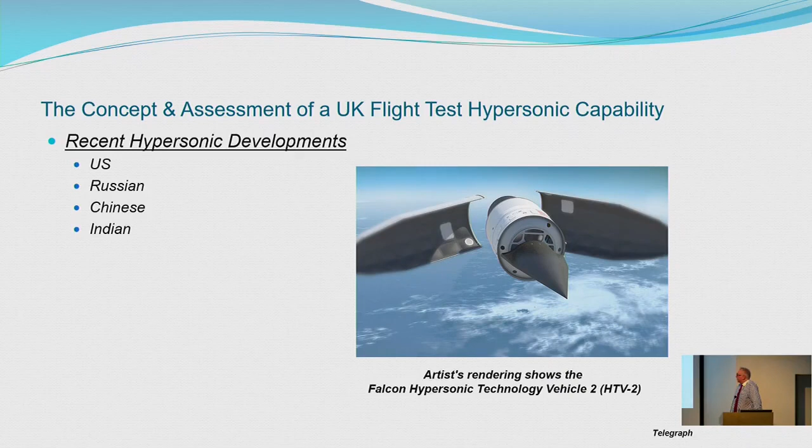From the US, we're now looking at some glide vehicles. The US does have some experience, quite a lot of experience within hypersonics. Their latest vehicles are things like the AHW and a previous glide vehicle that they tested, which unfortunately failed due to some issues we'll have a look at later. But that goes to show just how difficult it is to do these sorts of programs. Remember, when we talk about hypersonic capability, we're not just talking about CFD and wind tunnels.

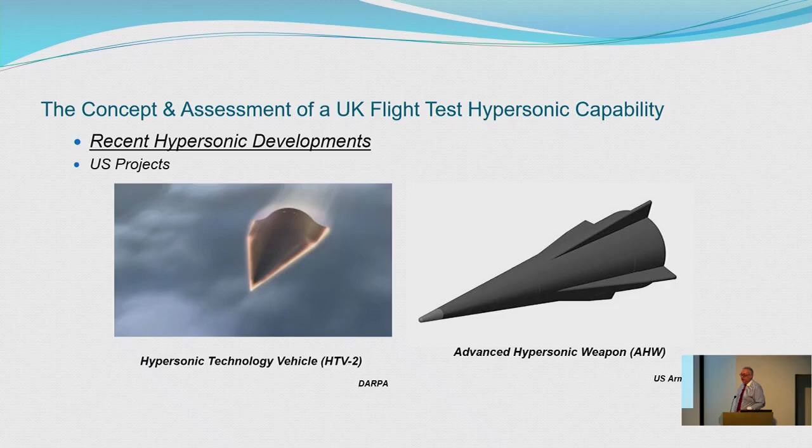The whole of this system, all of these elements need to work together as one. It's a lot of systems engineering that needs to go into these programs. Even more so if you decide to put some form of propulsion system on your vehicle, because then you've got to worry about propulsion integration and things like air intakes, etc. So a lot of studies would need to be done. And the only way that we currently have to try and see how all of these can work together is by doing some form of real-life flight test.

So HTV, primary effort for the US between 2003 and 2011, designed to glide at a very high Mach number, Mach 20. Two test flights were done back in 2010 and 2011. Unfortunately, the test flights were not a resounding success, mainly due to some control issues that then led to the aerostructure breaking up. So again, another important element for these types of vehicles, and comes back to capability, is how good are your materials, how good are your manufacturing processes to build these types of vehicles.

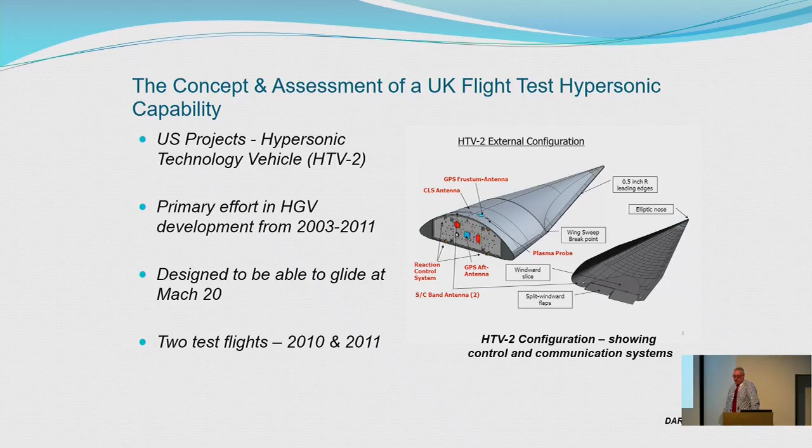So this, in a way, was a bit of the wake-up call that the West received with regards to glide vehicles and hypersonics, and especially the progress that the Russians have made.

So the Russians have also been looking at scramjets and hypersonic work for quite a while, but this was the first program that they made public in the best way that they can. It was revealed by President Putin in one of his State of the Union addresses or Federal Assembly address in 2018. The main reason that they give is to avoid any US anti-ballistic missile systems.

A number of test launches have been conducted. The last one was in December 2018, and I believe now this system, if you go by official releases from Russia, is now operational. It's launched from one of their larger ballistic missiles, an SS-19, which is also being replaced by their new next generation long-range ICBM, which they call SARMAT. Similar to the HTV, this was going to be able to glide about Mach 20.

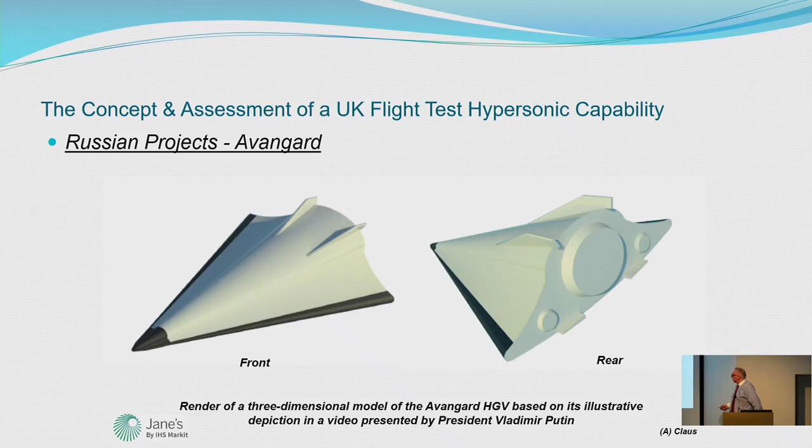Again, if we think about how someone would use these, the best way to get the biggest bang for your buck would be for your launch vehicle to carry as many of these as possible. So this is just an artist's illustration of how these glide vehicles could actually be used. What we're seeing here is the original test vehicle, and this is possibly what could be done for SARMAT, their latest system. Now, whether or not they would plan to use these vehicles as a like-for-like replacement for conventional RVs is still up for question. However, they've come quite a long way in a relatively short time.

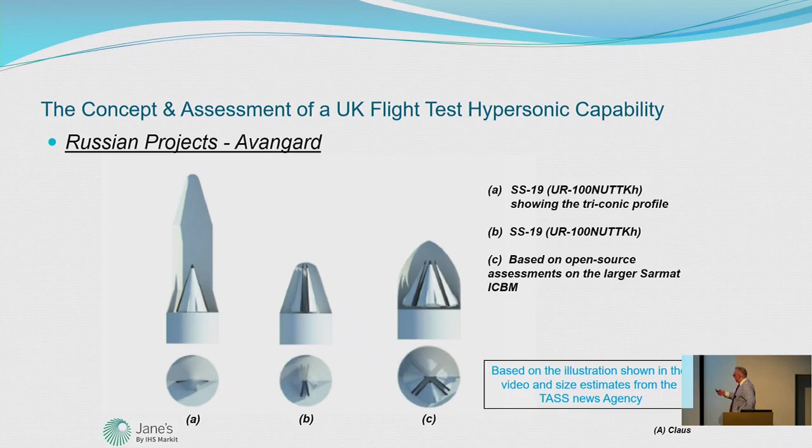The other area that was a bit of a shock to the West was what's been going on with China. China has been following quite an ambitious program in hypersonics, which has resulted in this DF-ZF, the glider part of their missile, their booster system, called the DF-17.

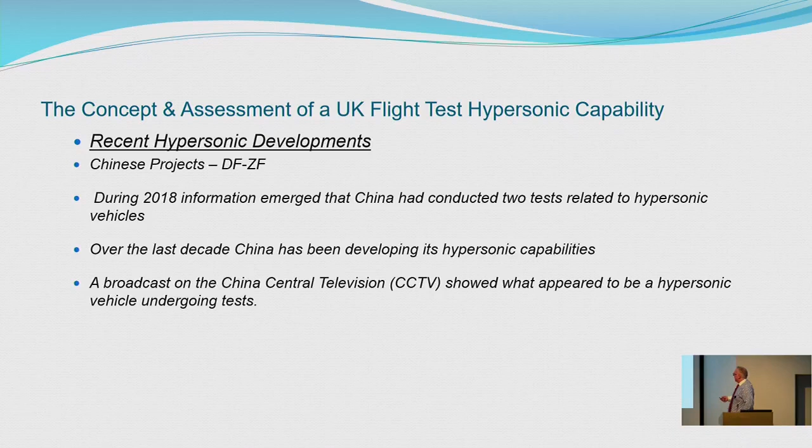Little bits were drip fed to the media about the work they were doing. Again, very interested in glide vehicles, with some pictures showing tests in a wind tunnel. This is an actual report taken from a news broadcast, showing a blue recreation of the vehicle, a lifting body configuration. At this time they were very highly focused on looking at glide vehicles.

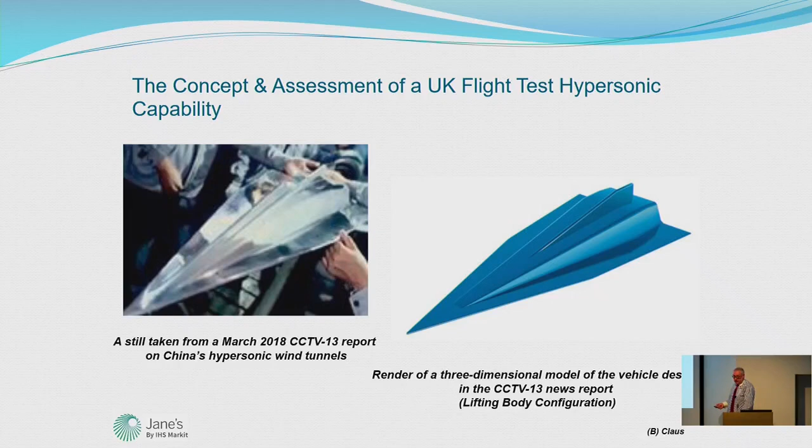To support their development capability, they've used balloon drop tests. Around the same time, some images appeared showing balloon tests. You might think, why would we want to do balloon tests with regards to hypersonic work?

Well, if we've got one of our models with a small rocket motor on the back, we could take our balloon launch system up to a given altitude, drop it, kick in our motor, and achieve some level of Mach number that we want. If the vehicle is instrumented, we can report back things like forces, temperatures, etc., which would feed into your overall development program.

It's quite a useful way to gain information at a relatively low cost. We don't have to worry about large-scale boosters, we're only really concerned with the manufacture of these drop test models. There were 3 different types that they were looking at.

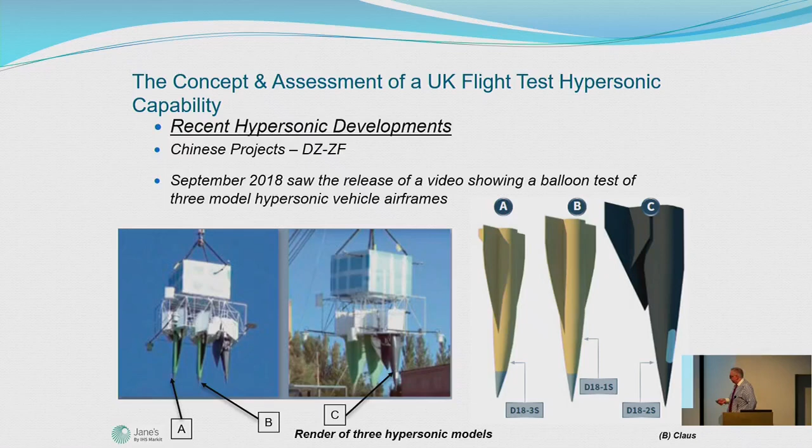All of this work fed into the DF-17, which was shown back in October 2019 as a new potential glide vehicle. Now, unlike the Russian system and the US system, this is a much slower vehicle, only going to about Mach 10.

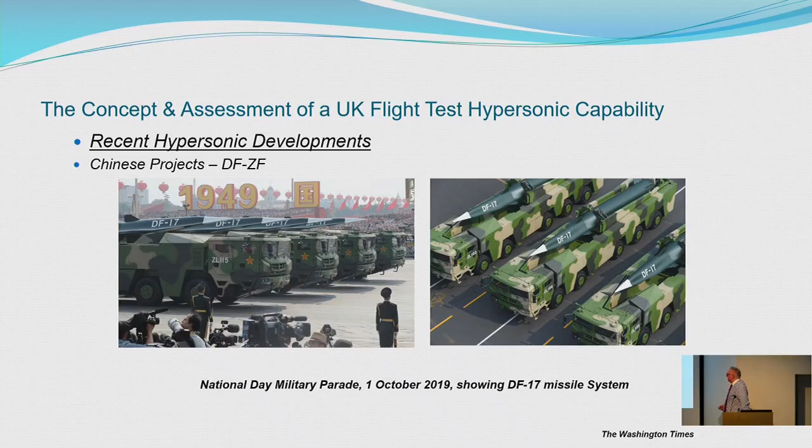But development of these sorts of systems has now caused a knock-on effect. It's not only the US, the West, that's concerned about hypersonic capabilities, it's also regional powers. One of those regional powers very interested in what the Chinese are doing is India, and we'll get onto them in a moment - I'm jumping the gun slightly. Essentially, China wants to try and match, and if possible surpass, US capabilities in hypersonics, not just hypersonics but also things like access to space.

They've actually done some further demonstration of that work on their capabilities. Many of you may be aware of seeing in the press that there was a lot of fuss kicked up in October of last year about the testing of a fractional orbital bombardment system - basically having a vehicle that would be in space and could then just drop warheads on you whenever it liked. There was quite a lot of discussion in open sources about that.

A number of sources picked up that this was another test of an HGV, but what was different to the previous test was the ejection of a secondary object or secondary payload. It's not clear what that payload was or what it could mean, however there are various ideas of what it could be, ranging from a submunition to an air-to-air defence missile - a missile to defend it against your incoming interceptor - or simple countermeasures.

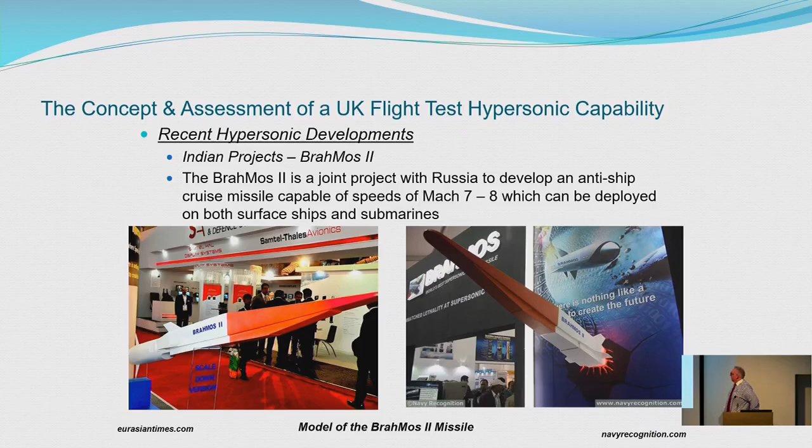Another little project they've done, and again feeds quite well into our discussion about test capabilities or flight test capabilities, is this one: their HSTDV, their Hypersonic Technology Demonstrator Vehicle. For this particular case, it's a scramjet-powered vehicle. It was launched by an Agni-1 ballistic missile and tested. The first test was not successful. A later test was.

The interesting thing about this is comments have been discussed about future development for this system and how this could actually be used as a carrier vehicle to carry either other ordnance and things like that. What's interesting from a technology development point of view is a lot of this is homegrown. There is some Russian input, and input from other countries as well, but a lot of the work has been done by India.

India has been developing a lot of their hypersonic capabilities, not just test but ground-based as well. Lots of new wind tunnels, new projects, mainly through fear of what China has or has not got. They're trying to catch up. So even though this only flew powered for, I think, 6 seconds, it's their first scramjet test of their own engine. And as we said earlier on, those 6 seconds of actual flight test data usability is actually worth its weight in gold.

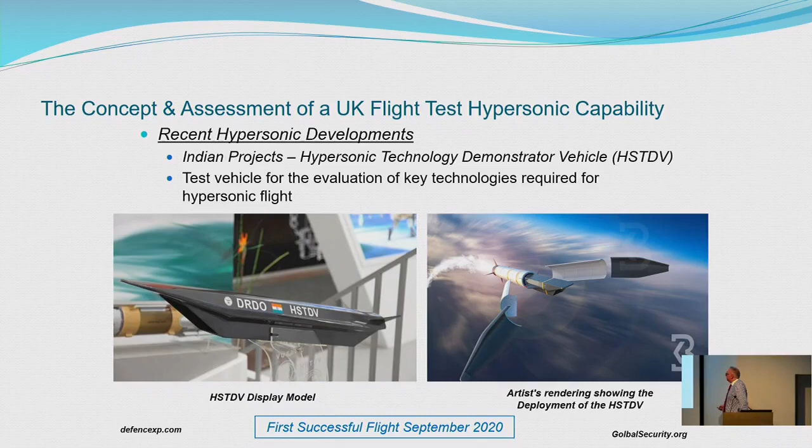First successful flight in September 2020. So the US response - these are only 2 of the hypersonic programs the US are currently focusing on. They're doing quite a bit to try not necessarily to catch up, but to move their hypersonic work forward. I think in the press there was a lot of talk about the Avangard and China, their hypersonic programs being a bit of a Sputnik moment for the US. I don't really think it was, because the US does have past hypersonic experience, things like HTV2. But anyway, these are the 2 they're working on.

AGM-183, which is an air launch system, hopefully will come in - they plan to have it operational over the next year or so.

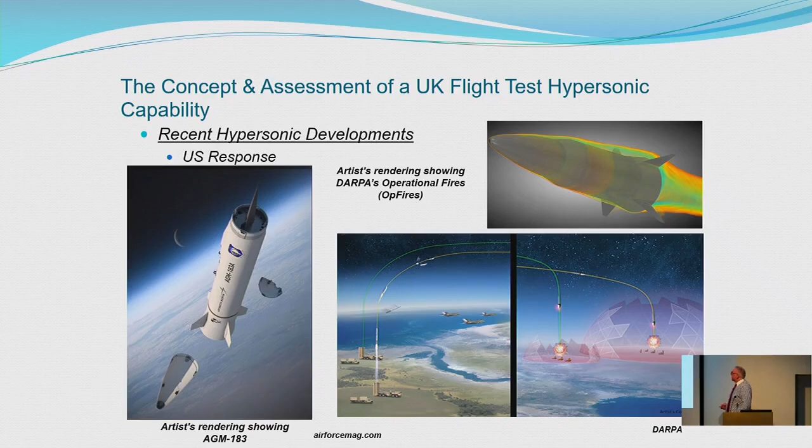So that gives you a bit of the background, but this is a challenge. This is just an illustration of some of the aerodynamic problems a vehicle would experience. This is a simulation done on the HTV2, actually from a Chinese paper. They've paid very close attention to what's been published online and have used that information to try and validate their own design expertise for the vehicle.

But it shows you some of the things that a ground facility, wind tunnel, or CFD would need to try and model. Now, although CFD has come a long way in terms of computing power and solving power, it still has problems trying to look at all of the flow physics.

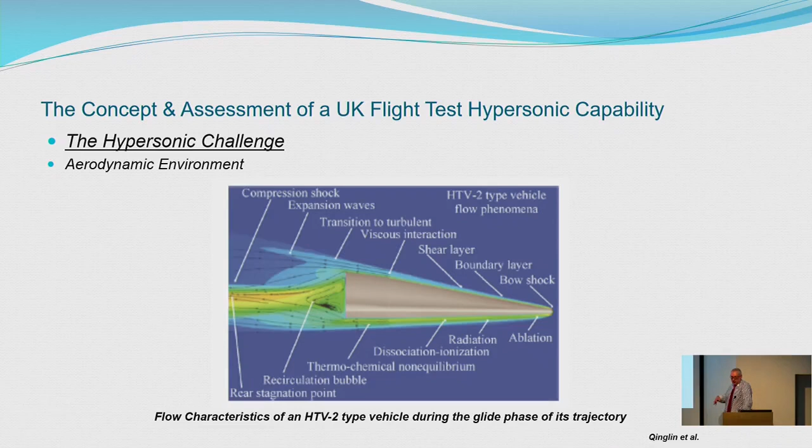So in terms of challenge - if we're talking about a vehicle design, whether it be something like the X-43, X-51, our glide vehicle, whatever it is hypersonic-wise - we've got to think about the design, trying to get all of that equipment into a vehicle that's going to be constrained in terms of its physical size, because of the carrier system or booster vehicle it's on. So trying to get good efficiency from a volume point of view, obviously aerothermal issues, performance - are we able to have the materials that will handle the heating and let us operate at Mach 20, 15, whatever we want to try and get to.

As we need to try and develop flight vehicles, it then becomes more of an interest in terms of guidance and control. And again, you can only really test your guidance and control systems for these types of vehicles if you've actually built something and flown it. The guidance and control systems will be a lot different between our standard air-to-air missile compared to our hypersonic cruise missile or our HGV, whatever it may be. So again, we need to think about guidance and control, TPS or thermal protection system, and also materials. So again, when we go back to capability - not for any capability, but as we're talking about the UK - we've got to think about material selection, and I should really point out manufacture.

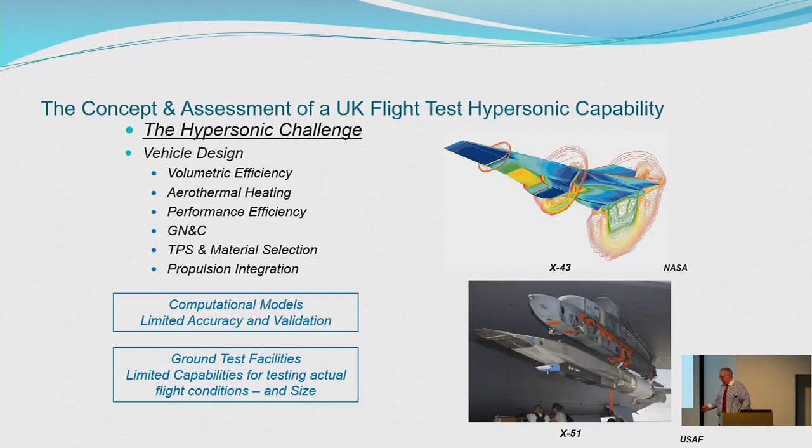So if we talk about a UK perspective now, what would we want to do? Well, we'd actually like to have a capability where we can develop and test key technologies, how they're applied, how they will be operated, and also their applications.

We've talked already about skill development and retention, thinking about how we can increase the skills within the aerospace and defence sectors. Having a flight test program, examples we'll see in a moment, could be used to help recruitment and retention in those sectors. And more importantly, gain practical experience not only in how hypersonic systems are designed, but how they operate. What challenges will your opponent have to overcome and still face to field such systems? So we can look at it from both angles.

So if we talk about the UK side, the UK does have hypersonic experience. I've seen several of you in the audience, and I've worked with you, so I am aware we've got hypersonic experience contributing to a number of studies and projects. So we're not starting from a blank sheet of paper.

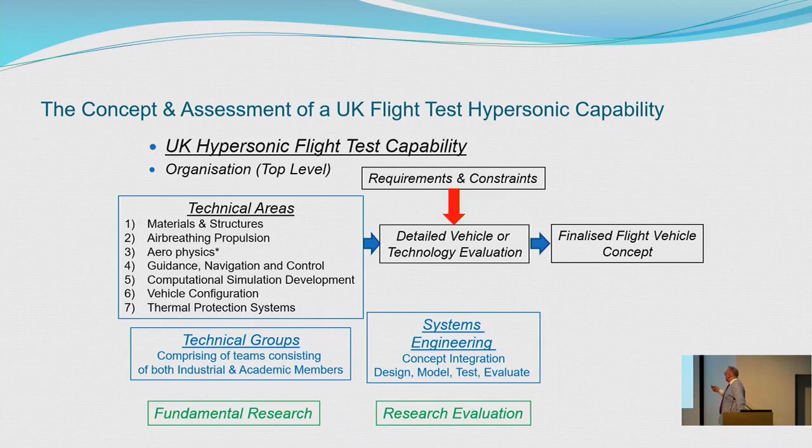So if we've got through the systems engineering, thought about our test and evaluation phase, and come up with a concept - here I've just used the X51, but it could be anything. It could be a glide vehicle. It could be just a scramjet engine that we want to test. Anything that you need.

But we need some process to help support that flight test capability, in order to contribute towards hypersonics, but also develop UK capability and knowledge within that area.

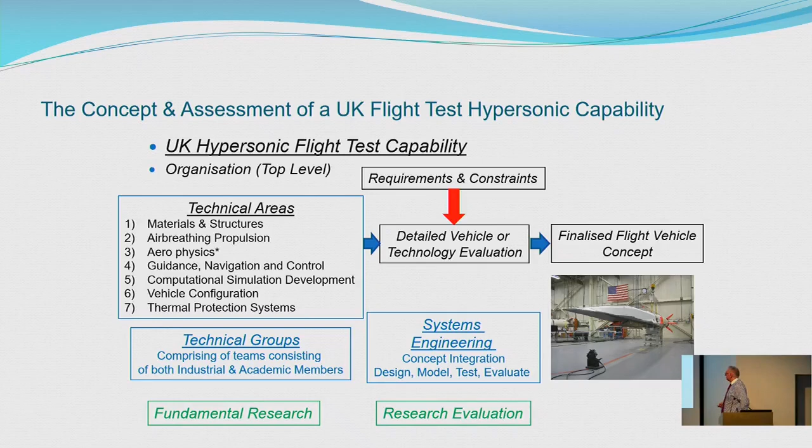So in terms of CADMID, here in terms of concept, well, fundamental research. Here, the equivalent would be research evaluation. In service, well, let's fire it and see what happens - get some useful flight test data. And also disposal - well, either recoverable, I'll come on to that in a moment, or a standard finish to most of these projects, which is they either end up in the ocean, or for things like the scramjet tests done in Australia, out in the outback somewhere.

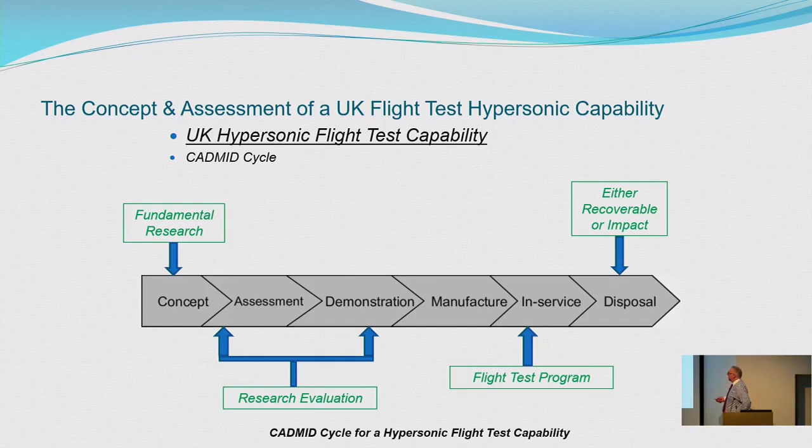So this is, if you like, a sort of cycle that you could apply to a flight test capability.

So what options do we have in terms of the UK? Well, if we want to do a national programme, we're not starting from a blank sheet of paper, but there are some gaps that we would need to try and address. Remember, in terms of heavy-duty hypersonics work, the UK has not done a lot of that for probably the last 30, 40 years. So in terms of that experience, we'd need to address those things.

One is obviously ground test facilities. So do you go to the expense that India and China are doing and spend an awful lot of money building new hypersonic tunnels?

Launch sites to conduct the flight tests. Now, if we were talking about this probably 20 years ago, I would say that poses a bit more of a problem. However, with the UK launch initiative done by the Space Agency, you may or may not be aware that there are currently a number of spaceports that are planned to be located around the UK. So whereas we would also have to think about doing flight tests from a sort of launch site that we didn't have, now that's not so much the case, and also initial costs. So from a national programme, we would have a little bit of a hill to climb.

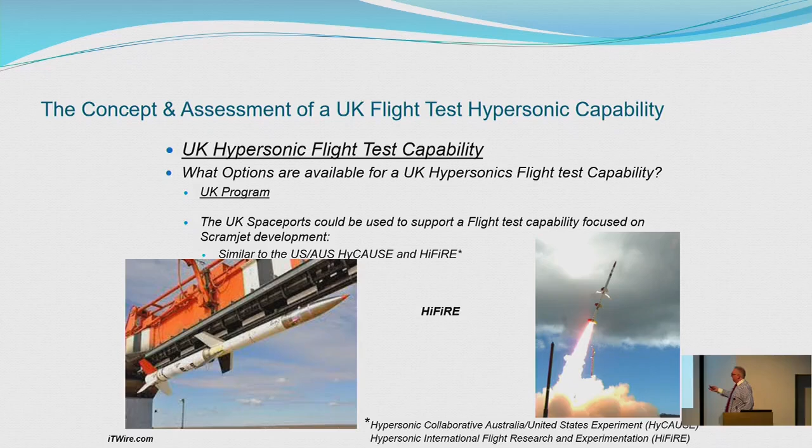Other aspects, so there's a lot of work going on in Australia, again looking at scramjet propulsion. This is something that has produced quite useful work and could be something that the UK could do or could contribute to. So maybe initial development of a similar sort of program.

However, really, if we're talking about hypersonics, a joint program would probably be the way to go. So again, if we can join a flight test program like the one shown earlier, or with the US, we'll gain flight experience relatively quickly. We'll have technical and cost sharing as well. So depending on what the program is, there might be interchange between the partners.

There was a recent announcement last week about the UK joining a US and Australian hypersonic program aimed at developing missiles. So these are sort of scramjet-based missiles. Now, it didn't relate to this specifically, but this is the current program that Australia are currently doing with the US. It's this Southern Cross Integrated Flight Research program. So this could be a way into that program.

The UK, US, Australia announcement was thinking about looking at hypersonic missiles being launched from tactical aircraft. So again, small scale, relatively small scale missile systems. So this would be a good way that, using the capability that we've already got, we can feed that into these programs based on the community that we've already got.

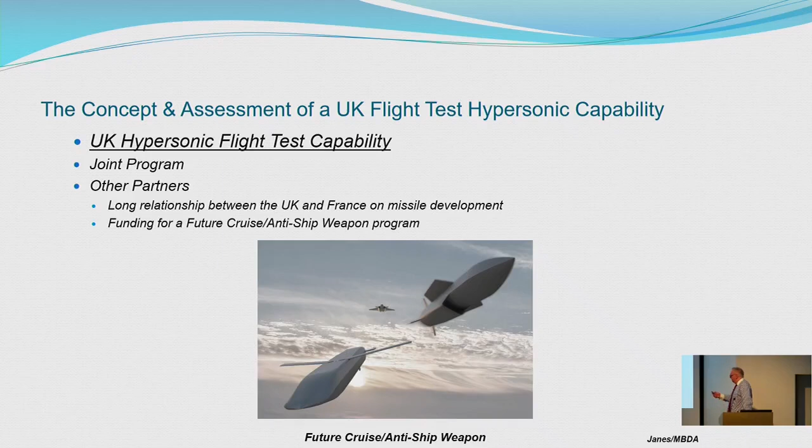Other joint programs, well, we've got a long relationship between the UK and France in terms of missile development. So the next one along is Future Cruise Anti-Ship, although whether or not a partnership could be developed in terms of hypersonic systems and a flight test capability, I would imagine is something still to be discussed or confirmed.

So what options for the UK? If we want to move away from cruise vehicles, because the other area of concern or interest is hypersonic glide vehicles, again, we'd have to do a joint program due to lack of suitable boosters if we're going for vertical launch. For a glide vehicle, a lot of the vertical launch sites planned for the UK, many of the launch vehicles that would operate from there will not have the payload capability to carry a glide vehicle at the moment, but whether or not that capability develops over the next few years, we'll have to wait and see.

So any sort of HGV would have to be a joint program. If we can contribute a UK element of that, we could use some horizontal spaceports, so doing an air launch system.

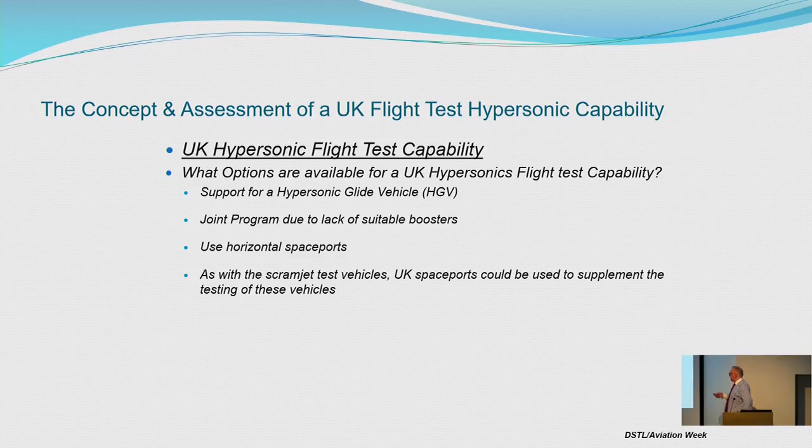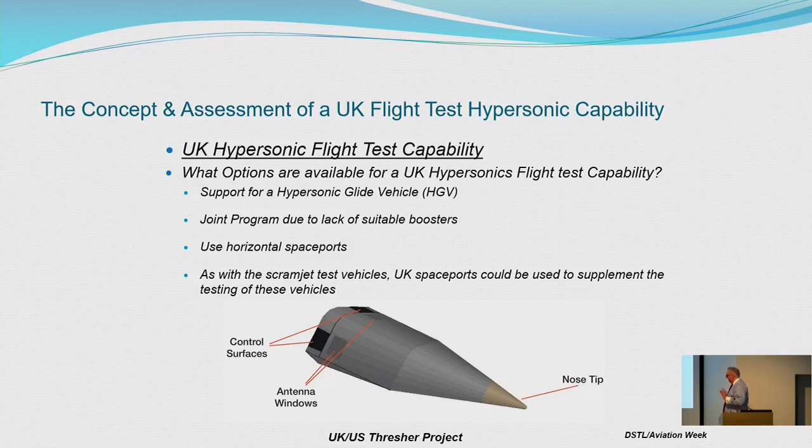However, we could also do some work similar to the Australians, doing some scramjet test vehicles and things like that. And I think for an HGV program or a scramjet cruise missile program, there is some capability that we could put together to test these types of vehicles. And that's just an image I got from Aviation Week about an example sort of glide vehicle project, or UK-US glide vehicle project.

So far in the discussion, most of the work, all of the systems that we've seen, at the end of their test, they are thrown away. So the question really is, should we consider doing a recoverable or reusable system? Should this even be a consideration?

So if we've got a system that's recoverable, again, I think it will provide really useful information in terms of visual examination of the complete vehicle and also specific components. So again, you can find out if your injectors have worked the way they should, if it's for a scramjet, or your aeroshell, on the leading edges, has held up as your code has predicted it would do, and also from the production side. So we can have a look at some specific components.

Again, we can feed that into our validation of design code, CFD, simulation, that sort of thing. This gives insight on how operating conditions have affected the vehicle, because we might spend lots of money building these HGVs or cruise missiles, and then when we deploy them, we might find that we haven't thought about some of the actual physical characteristics of their flight, and that degrades the capability of the system.

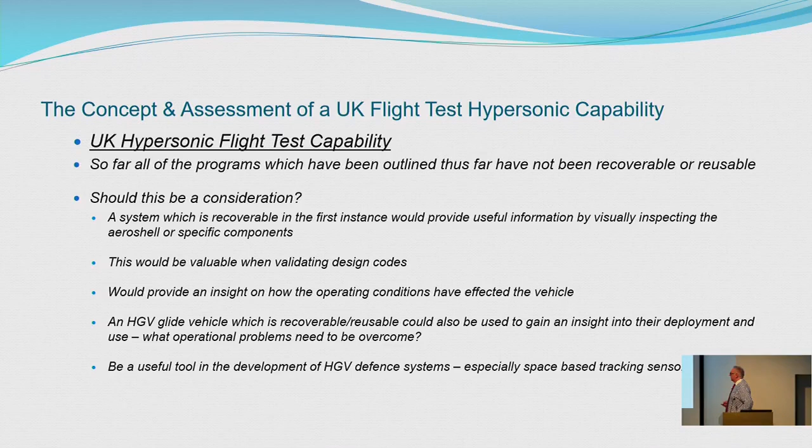So I'll give you a little scenario. This is a very rough exercise talking about supporting an HGV program. It's going to be air-launched from one of the spaceports to a set location where it's released and ignited. It will then fly off on its trajectory, taking us up to the Hebrides range, where we can then do our actual flight tests.

If we want the capability to reuse or recover it, there are options available, or we can just do what all the other previous tests have done and crash it right into the sea. But I think that approach is a little bit short-sighted, because of all the potential benefits of physically seeing something yourself and how it's behaved.

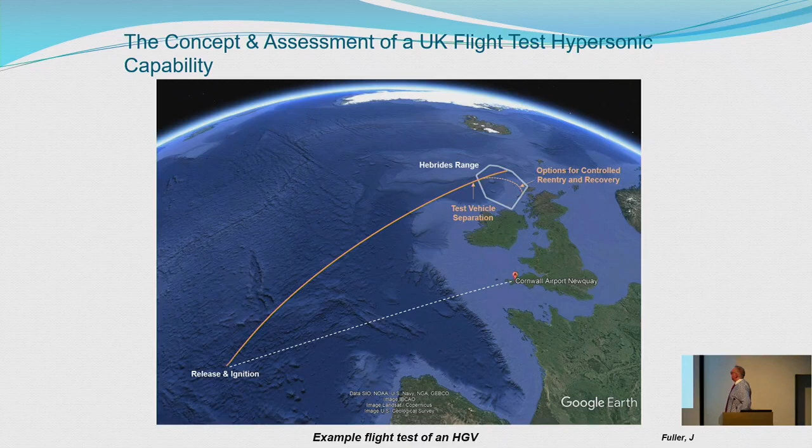I better finish up. In terms of test capability, the UK does have capability. However, if we want to go down the UK-only program route, we're going to have to put in a lot of money, a lot of investment. So the UK-only program might be a little bit beyond our means.

Whichever path we take, it needs a commitment by the government and the end users as to what this type of system would need to do. Recent developments, as we said earlier with the announcement with Australia, has indicated this, but it's got to be sustained. We need to get out of this continued peaks and troughs cycle, otherwise we're not really going to get any further forward.

A joint program supported by the UK would be the most practical way forward. Remember, with the possible use of spaceports and people operating from there, we've got something more to bring to the table. For a joint program, it depends whether the UK wants to see itself as a Tier 1, Tier 2, or Tier 3 player, similar to what the F-35 program has shown. What more could you bring to the table and get more involved?